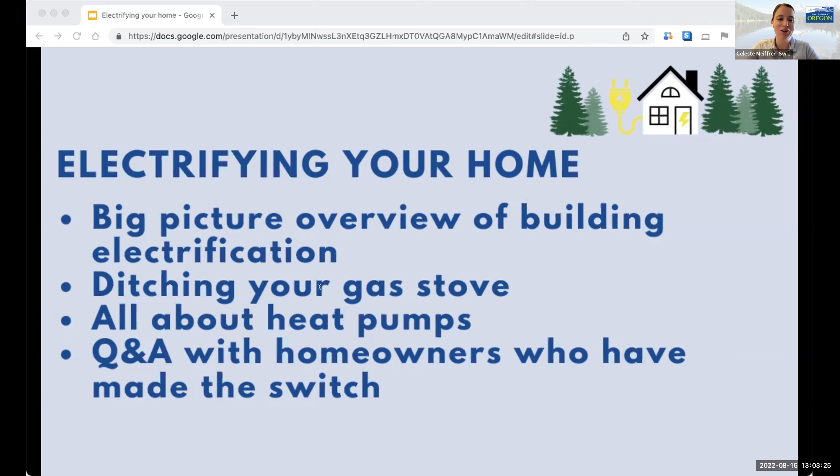So why electrify your home? A greener, healthier world requires each of us to do all that we can to eliminate the pollution and practices that are warming the planet and changing our climate. To get there, Oregon and the United States must move toward meeting our energy needs with 100% renewable energy like wind and solar. That's going to require that we get the most out of every bit of energy we use and that we stop burning fossil fuels, including in our homes and commercial buildings.

Buildings are second only to transportation as a source of climate pollution here in Oregon, responsible for 34% of the state's total greenhouse gas emissions. There are almost 140 million housing units in the United States and 5.6 million commercial buildings. 3 out of every 4 American homes uses fossil fuels directly for space heating, water heating, and appliances. So the direct burning of fossil fuels accounts for more than half of all energy used in homes and at least 34% of all energy used in commercial buildings.

These tens of millions of housing units and millions of commercial buildings will eventually need to be electrified. Wind and solar power are rapidly replacing dirty fossil fuels like coal as leading sources of our electricity, and our grid is only going to get cleaner and cleaner. In 2021, the Oregon legislature committed our state to getting 100% of our electricity from clean sources like wind and solar by 2040.

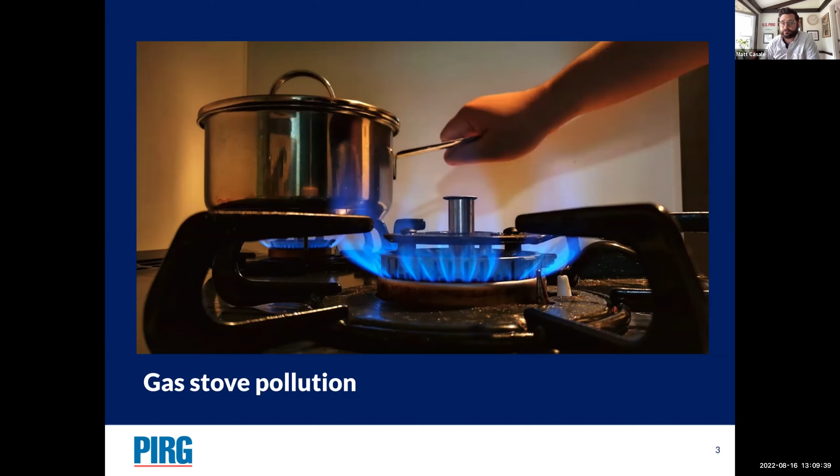If you do have a gas stove in your home, this is no time to panic. You don't need to run and rip it out of the wall right now, although we'll talk about ways that we can get there. There are steps you can take to protect yourself and your family in the meantime, but they're not perfect solutions. So next time you are in the market for a stove, I would consider going with electric or induction.

In the meantime, some things you should do: make sure you have proper ventilation in your kitchen. It's best to use a ducted vent hood, meaning your unit actually vents outside rather than circulating the air inside. Use it every time you cook, not just when you burn something. To the extent possible, only use the back burners, which are more likely to be captured by the vent. Open windows or doors to allow air to circulate. Get an air purifier that can help with particulate matter. You could also buy a low-cost portable plug-in induction hob, which is basically just an extra burner or two that doesn't run on gas, which you can plug into your wall and use in lieu of your gas stove whenever possible.

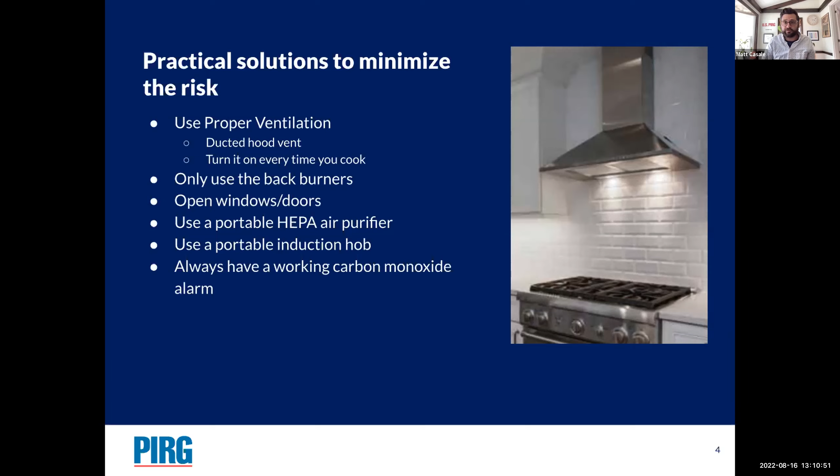So some ways to protect yourself if you have a gas stove. But ultimately, we shouldn't have to go to all these lengths just to make sure that a product we've purchased legally and installed correctly isn't pumping pollutants into our homes.

I'm calling this slide policy solutions, but it's really about the bigger, broader changes we need to protect people from indoor air pollution and move our society off fossil fuels like methane gas and toward renewable energy and electrification. These are things governments should do, things manufacturers and retailers should do in order to make sure people are protected.

First, we can and should adopt health-based indoor air quality standards and ventilation requirements for gas stoves. We shouldn't allow products to be sold or installed in homes that will exceed health-based standards and that don't meet strict ventilation requirements. We should also require gas stoves to include warning labels so people know what they're getting into when they purchase one.

Because electric and induction stoves run on electricity and not gas, they are more energy efficient. We should also provide local, state, and federal incentives for kitchen electrification. We'll talk about some brand new federal rebates in a minute, which will be effective in about 20 minutes when the bill gets signed.

Also important to remember, we need to protect people who rent or live in public housing, people who don't purchase their own stoves. So we should require electrification in public housing, require landlords adhere to strict air quality standards, and provide incentives for electrification of rental units.

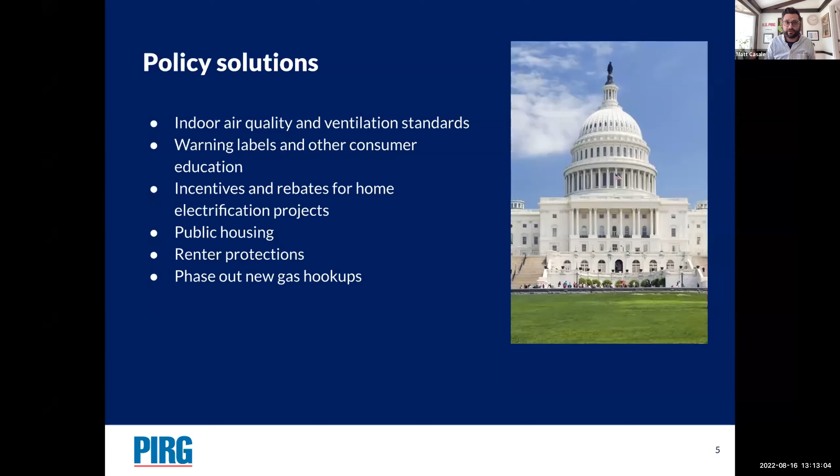Okay, so gas stove pollution, that's how I bring the mood down at every party I go to, or anytime I see my family and someone has a gas stove. Now I want to talk about some of the more exciting good news type stuff.

Fortunately, we do have options, and they are really good options. I have an electric stove in my house and I love it. It has a quick boil feature. It's not as fast as an induction stove, but it does boil water really fast. And I do have 2 young daughters who are 2 and 5. They love their mac and cheese. And when I'm being heckled by a 2-year-old and a 5-year-old to get their mac and cheese on their plates faster, it's nice to be able to boil water fast. So that's one side benefit.

Electric cooking has come a long way. Stoves like the one that I have are actually really nice and work really great. And there's no more of those coils that everybody used to hate.

Induction cooking, I like to say, is the future here today. In fact, it's not that new, and it's been used in Europe for a long time, but it is newer to many people here in the United States. The technology is really cool and exciting. It's fast, efficient, and pollution-free. Induction cooktops use magnetism to heat metal cookware.

When you turn on the stove, the electric currents underneath the smooth cooking surface creates a magnetic field within the cookware itself. So that means the heat is directly transferred to the pot itself. The stovetop actually doesn't get that hot. So that allows you to boil water faster. It allows you to have greater control over temperature. Lots of professional chefs actually are now adopting induction because of the precision and skill you get with induction.

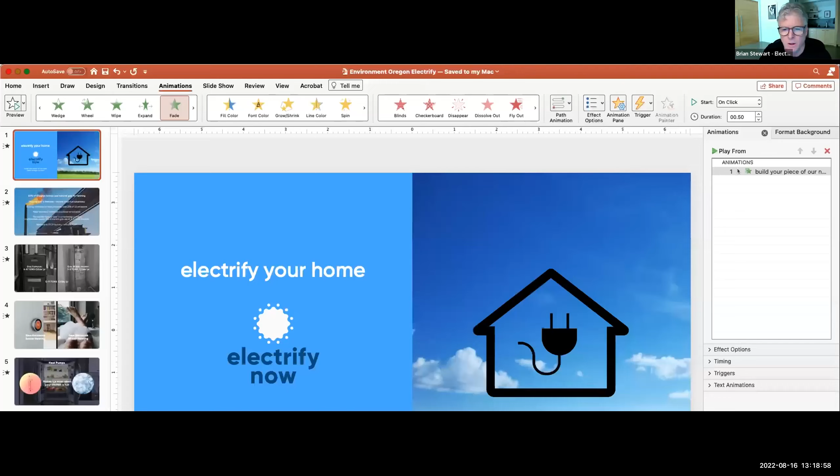We're an all-volunteer organization, and our reason to exist is to help people understand the benefits of electrification, not only to cut carbon emissions, but to make your home safer and more comfortable, as Celeste said. And we like to think of this as a systems problem that we've got. Our current fossil fuels based energy system is the number one reason that we're having these conversations about climate change. And so we like to think about these actions that we're about to talk about as ways that you can help build your little piece of the new clean energy system that we need for a sustainable future and just better lives altogether.

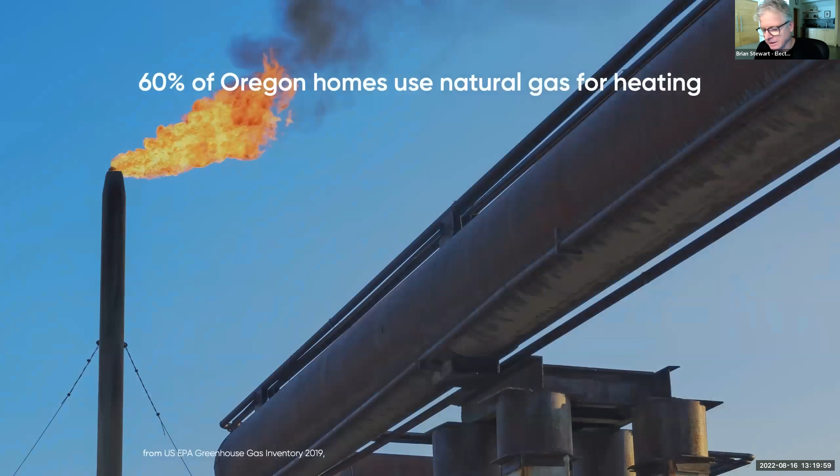The reason this is so important here is to talk Oregon specifically. 60% of the homes in Oregon use natural gas for heating. And we've all kind of grown up with this idea that natural gas is clean burning fuel. It's a marketing ploy from the gas industry. They're really good at this, but it couldn't be farther from the truth.

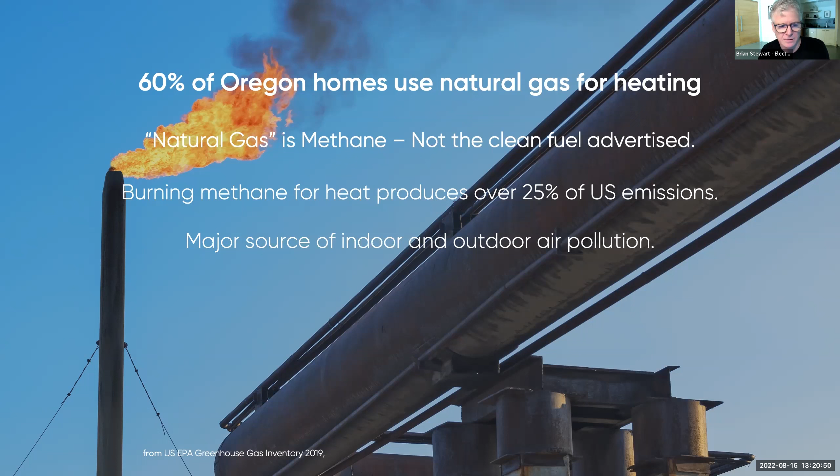Burning methane, which is what natural gas is, produces over 25% of US emissions, and that's just for using methane for heating. This doesn't include the methane that's burned for electricity. So heating our homes, our offices, our buildings, our industry is a huge part of the overall carbon emissions in the world. And it's also a huge source of indoor and outdoor air pollution. We tend to think about cars and coal plants and stuff as creating air pollution, but all of our gas burning devices, natural gas or methane burning devices, create indoor and outdoor air pollution.

You may have been hearing from the gas utilities. Northwest Natural is really aggressive about this, talking about renewable natural gas as if that's going to fix everything. This is another marketing concept from the gas industry. There's some benefits to renewable natural gas, but it's just not going to solve the problem. The idea that we can just keep burning gas in our homes because it's going to be renewable is literally a pipe dream. And that's because at the very best, we could expect about 15% of the current gas use to be supplied by renewable natural gas.

And it's expensive. It's like 2 to 5 times the cost of fossil gas. So the idea that it's going to just be the silver bullet to replace our current dependence on gas for heating our homes is just not true. So it's important for all of us to get our brain around the idea that we have to stop burning methane as soon as possible. Reducing is great, but it's really about stopping our dependence on fossil gas.

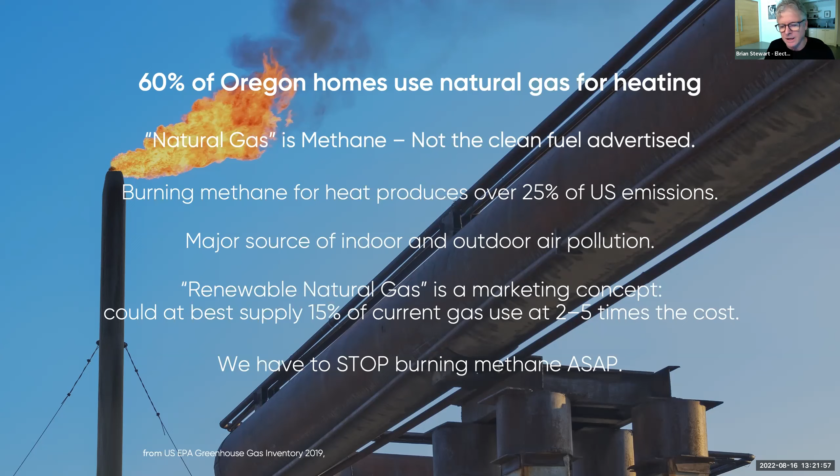That's the answer. And in our own homes, the big culprits are our gas furnace and our gas water heaters. These two devices consume the vast majority of the energy in our homes and produce the vast majority of carbon emissions.

Collectively, it's something like 5 to 11 tons, and this range reflects the different sizes of our homes, the different energy efficiency levels of our devices, how well insulated our homes are, how much water we use. If you have teenagers, for example, you're going to be at the higher end of the spectrum here. But just to put this in perspective, an automobile produces 4 to 8 tons.

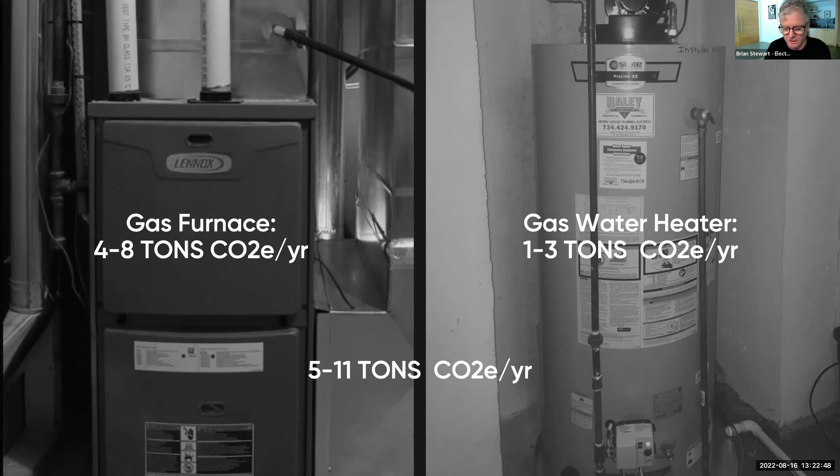So your home, if you're heating with gas, is producing more emissions than an automobile. I think most of us kind of get it that cars produce emissions, but it's more invisible to us, the emissions that come from our home. But it's entirely possible to have zero emissions space heating and zero emissions water heating. That's what we're going to be talking about today.

And the reason that this is possible is because of a technology called heat pumps, which most of us are kind of unfamiliar with, and they can appear to be quite magical in the way they work. But I think for most people, the simplest thing is just to understand that we've had these devices in our homes for years. A refrigerator is a heat pump, for example. And the way it works is it moves heat from one place to another, so it's pumping heat. That's why it's called a heat pump.

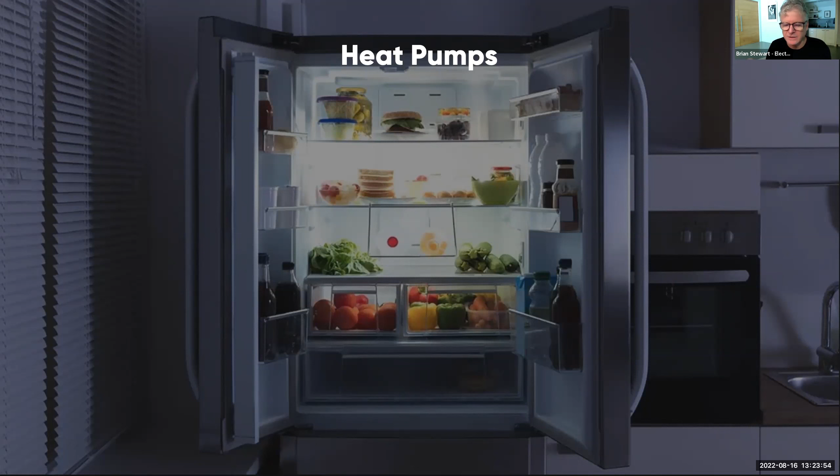So in this case, it moves heat out of your refrigerator into your kitchen. So your kitchen gets slightly warmer, and inside that insulated refrigerator, it gets dramatically cooler. In fact, it can even make ice. And the amazing thing about this, if you've ever put your hand behind a refrigerator, you've probably felt that hot air, or maybe it blowing hot air from underneath. That's this transfer of heat from one place to another. And it's incredibly energy efficient and effective.

Even if your kitchen can be really hot, like last year during the heat dome, our kitchen was almost 100 degrees before we turned on the air conditioning, and we were still able to make ice in the refrigerator. So these heat pumps can deal with huge temperature differences and are incredibly efficient.

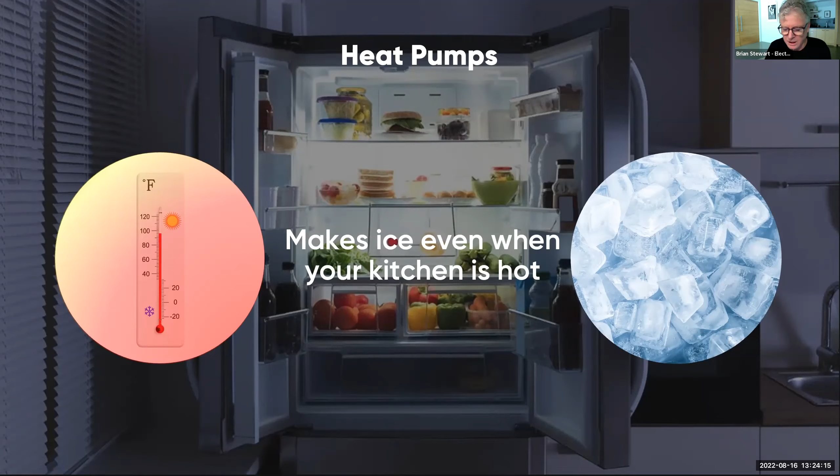The easiest of the two, space heating and water heating, to get your brain around is probably the water heater, although in some cases they're the least familiar to us. This technology has been around for decades. It's just starting to get market penetration. It's something in the single digits in terms of new installations are heat pumps now, maybe as high as 10% in some places. We've had ours for years.

They look just like regular water heaters, but the way they work is they move air across this unit at the top, moving air across a coil that has refrigerant in it. It absorbs heat from the air. Then that refrigerant is compressed, which increases the temperature content of the refrigerant, and then the refrigerant is pumped around through these coils around the storage tank to heat the water, and then that cools the refrigerant, and then it goes through that cycle again.

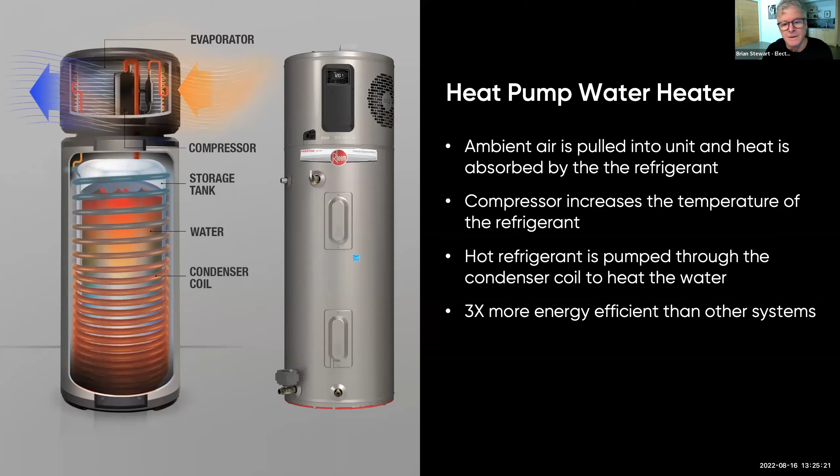And these things are insanely efficient, 3 times more energy efficient than any other way of heating your water, which is dramatic. So what that turns into in terms of operating costs is also very attractive.

These are 3 typical systems: electric storage, which is the most expensive to operate. This information comes from the EPA, energy guide labels from the Department of Energy. Gas storage units are slightly less expensive to operate, and gas tankless are thought of as the most energy efficient, although they've got their own problems with emissions that we won't talk about today. But these are the 3 typical systems that you will see.

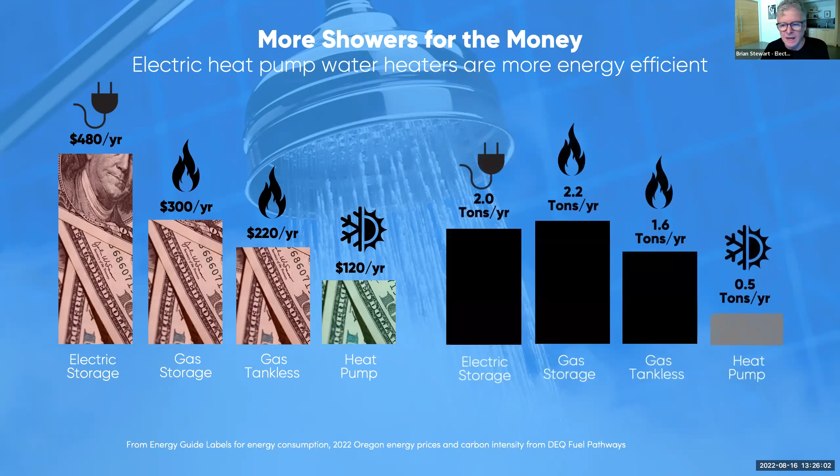A heat pump is dramatically lower in cost to operate than any of those. By far the cheapest way to heat your water, and by far the fewest carbon emissions per year. And this is just with standard electricity right out of the grid, at average Oregon emissions levels. You can get renewable energy in your home.

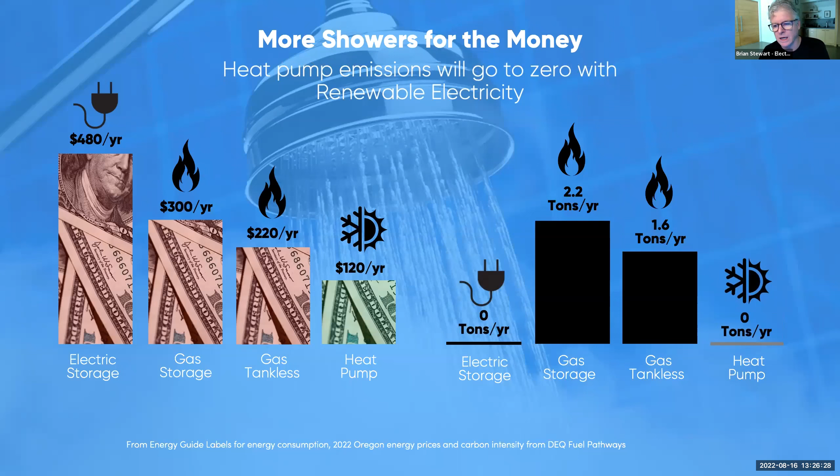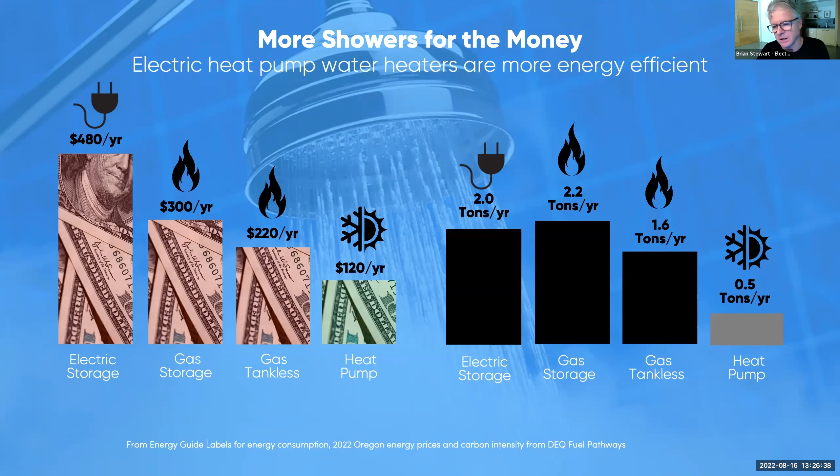And you can get 100% clean energy in your home today, literally, in which case you will have 0 emissions from your water heating. So I like to think of it, this is the way things look today, but because of these laws that Celeste mentioned, the 100% Clean Act here in Oregon, very soon it's going to look like this for everyone. But you can do it today by getting renewable energy through community solar and other methods.

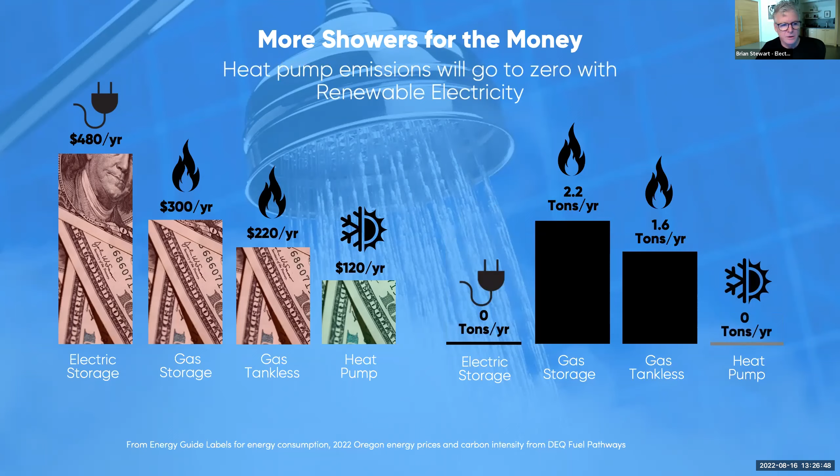They're the distributor for the Rheem units and other models. You can get $1,000 off a 50-gallon hybrid unit. They're often called hybrid electric water heaters, or heat pump water heaters. That $1,000 off will be shipped directly to your home.

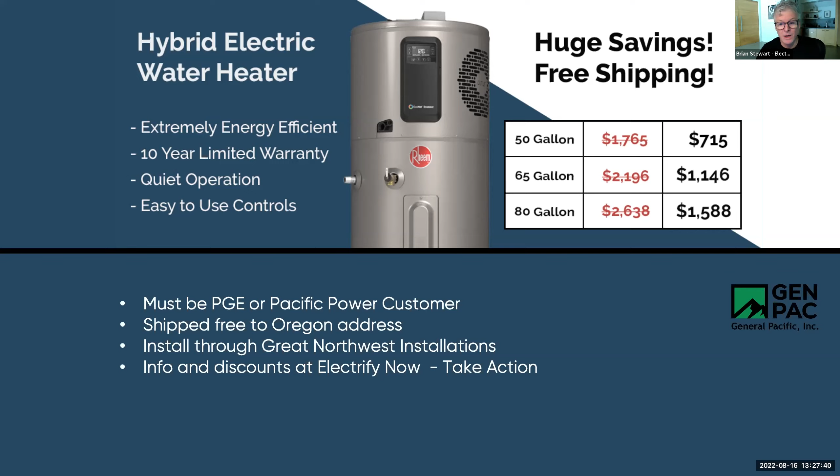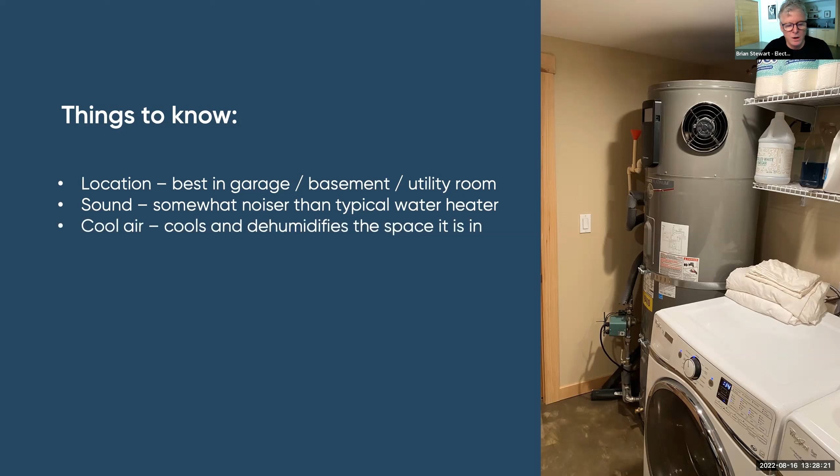It's important to know a few things about these devices. They're a little different than other water heaters. Their best location is in a basement, a garage, or a large utility room, partly because they make a bit more noise than a typical unit. If you have a power vent gas water heater, they're quieter than that, but if you have an electric water heater, they're noisier. They're like a refrigerator, but you don't want this next to your living room, for example. They produce cool air because they're taking heat out of the space they're in to heat your water, which lowers the room temperature by a couple of degrees. So again, you don't want that in your living space.

They're slightly taller than conventional units and need enough cubic volume of air around them to operate — about 700 cubic feet is typical, so like a 7 by 10 room. They also need 240 volts of electricity. If you've got an electric water heater now, that's no problem since it also uses 240. But if you've got a gas water heater and are replacing it with an electric heat pump, you'll probably need an electrician to run a new 240 line to the water heater's location. It also needs a condensate drain.

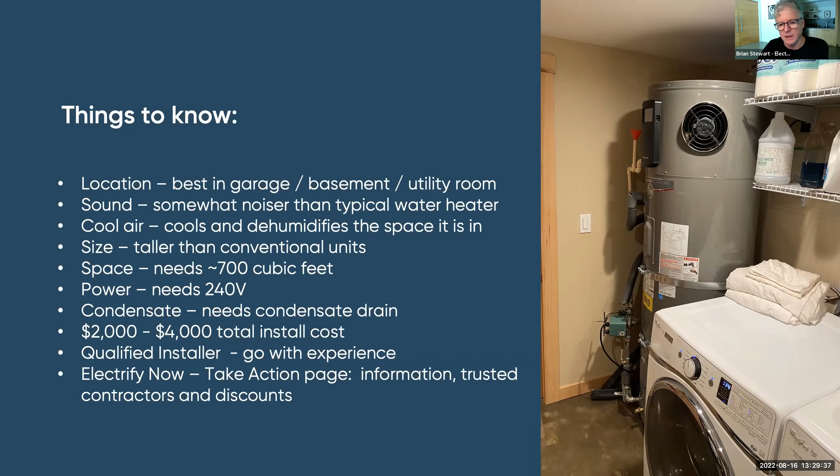That's nothing to be concerned about — gas furnaces have these, a lot of devices have these, and a plumber can do it, no big deal. Total installation cost runs about $2,000 to $4,000. It'll be on the lower end if you're replacing an electric water heater, and towards the higher end if you've got a gas water heater, but it depends on your situation. Go with a qualified installer — don't just call any old plumber, since some of them will try to talk you out of it. We've got great information on our website about trusted resources, contractors, and discounts, so check it out.

These things are amazing. They give you the same water heating performance, the same hot water you're used to. They're cheaper to operate, with much lower emissions, even potentially zero emissions. And they come with a 10-year warranty, which shows the confidence manufacturers have in this technology — a typical water heater is more like 5 to 6 years. So these things are not going to break, it's not squirrely technology. It's ready to go, so go for it.

Let's talk about space heating. It's similar technology, but in this case the condenser unit is outside, and ambient air is pulled across that outside unit. They're typically shaped like cubes, similar to an air conditioner, or you can find them with side discharge, more suitcase shaped. This is outside your home, harvesting heat from outside, consolidating it in refrigerant and compressing it to increase the heat value, then pumping it into the house. That refrigerant heats air which is blown into the home. The amazing thing about heat pumps is they can operate in both directions for space heating — so it can work as an air conditioner but also heat your home. Same device, you don't need two devices.

And they're incredibly efficient, like we talked about before. You often hear the term COP, or coefficient of performance — that's a ratio of the heat energy you get, think of it as BTUs of heat divided by the BTUs of energy it took to produce that heat. These have a COP of 3, meaning you get 3 times more heat energy than the energy you purchased to run the device. That's 300% efficiency. Just for comparison, the most efficient gas furnace is like 0.95 efficiency.

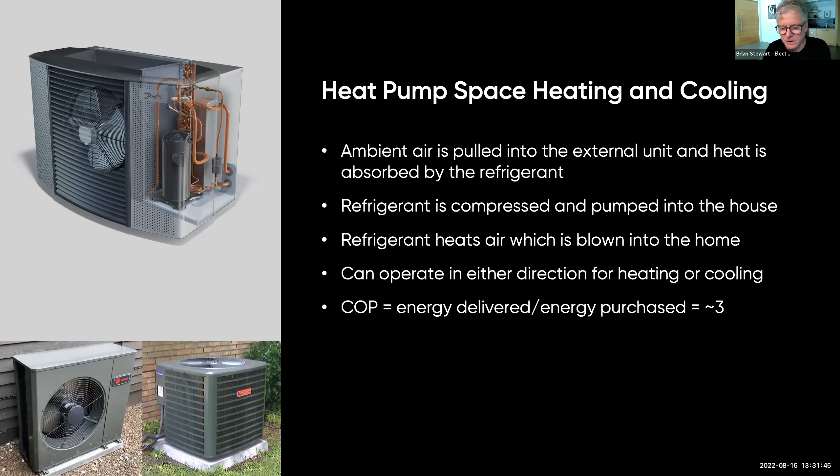They come in 2 different kinds of configurations, and there can be combinations of these things, but to keep it simple, there's ducted systems, which provide heating and air conditioning. This is the best solution if you've got a gas furnace now in your home and ducting.

So you can see there's this external unit we talked about. The refrigerant lines go into your house and into this air handler, which looks just like a furnace, which is connected to the ducts, which blows that warm air or cool air into your home.

The great thing about these ducted systems is you can put really good filtration systems on there to filter out smoke and dust particles, anything that you don't want to be breathing. You can even put HEPA filters on there, which increases the amount of filtration you get, which is really great for those smoky wildfire days.

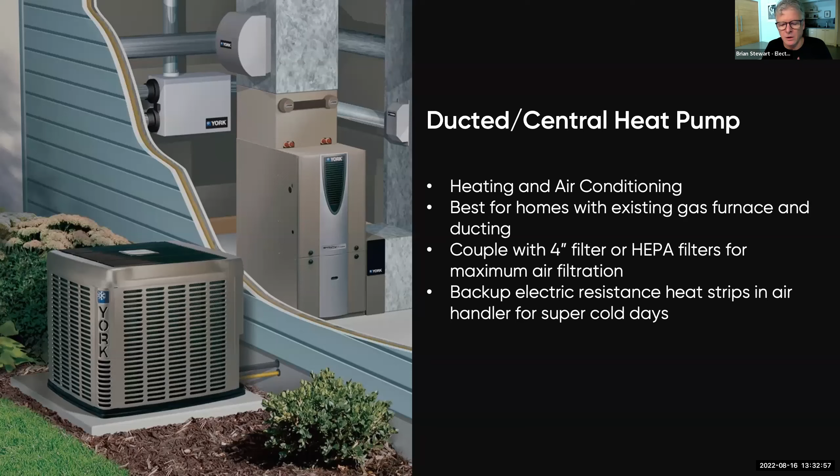And these things can come with backup electric resistance heat strips inside the air handlers for those super cold days, just to make sure that you are always warm and comfortable. We have that in our home, and we can see when they turn on. It's a few hours literally every year that they're called into service because the heat pumps are so effective.

They also come in what's called ductless or mini split configurations, where you also have this external condenser unit outside, compressor condenser outside, refrigerant lines that go into your home. But instead of ducts, now you've got what's called a wall-mounted head or mini split that's up on the wall, and this has a fan in it that's going to blow warm or cool air into the room.

And so you can get these that have multiple heads for multiple rooms. The best application for these devices are homes that currently have electric baseboard heating, or maybe you've got a gas furnace and one room is really cold and you can use this to make that room more comfortable.

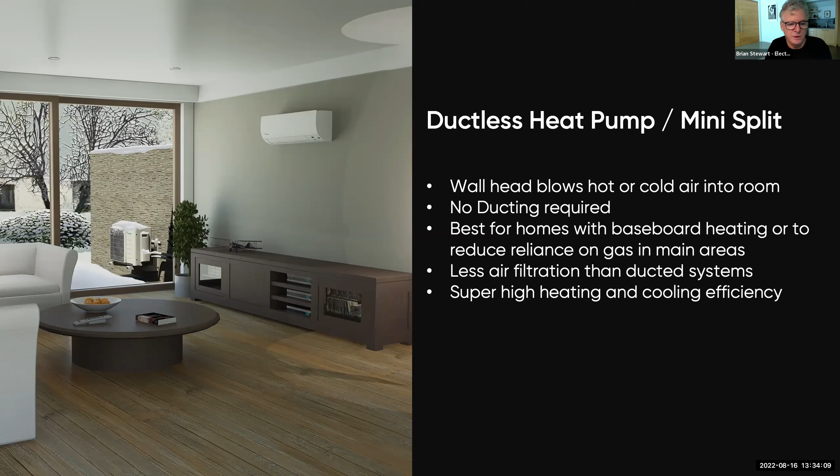Or you can massively reduce your reliance on gas heating by putting this type of system in the rooms that you occupy most, like your living room, your dining room, your kitchen, and then the other rooms can be heated with gas, and that can massively reduce the amount of gas heating that you use. They don't have as good filtration options, but they're incredibly efficient. These are some of the most efficient heating systems that are out there.

In terms of cost, these are the 3 typical systems that you see in older homes. Some old homes still have oil furnaces. That's starting to be a bit rare, but some do, and it's incredibly expensive to heat your home with oil. This is the cost per million BTUs, that's just an easy apples to apples comparison for the cost of heating.

But you can see what that translates into annually for typical homes in Oregon. Very high cost for oil furnaces, also high cost for electric baseboards, which is why gas furnaces have been so popular. They're cheaper than either electric resistance or oil furnaces. And this is why so many homes swapped out into gas heating many years ago.

But if you compare that, if you're upgrading, you could upgrade to a high efficiency gas furnace and save more money because you'll get a more efficient system. Electric heat pumps are as cheap or cheaper than the most efficient gas furnaces. So if you're going from an older gas furnace, you're going to see a cost savings with a heat pump.

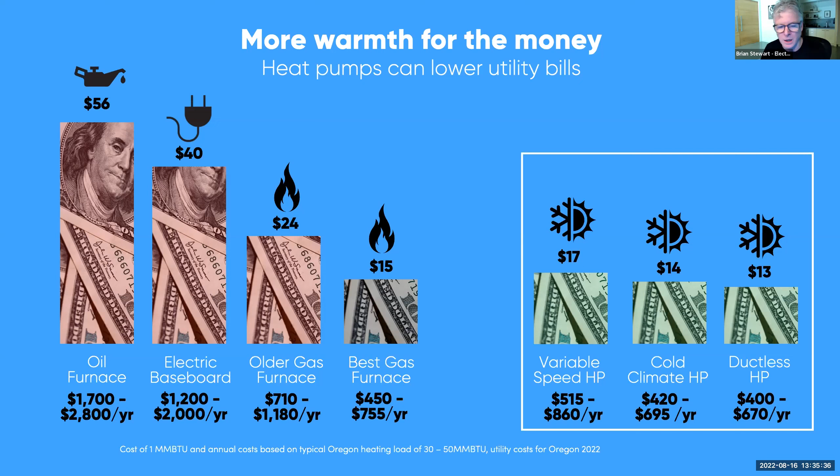If you've got a new, pretty high efficiency gas furnace and you just want to do this to lower your carbon emissions, you won't probably see a huge savings in terms of the cost to heat your home, but you will be getting air conditioning with the same system, and you will dramatically reduce your carbon emissions. This is what it looks like for the conventional systems, and heat pumps are dramatically lower than that.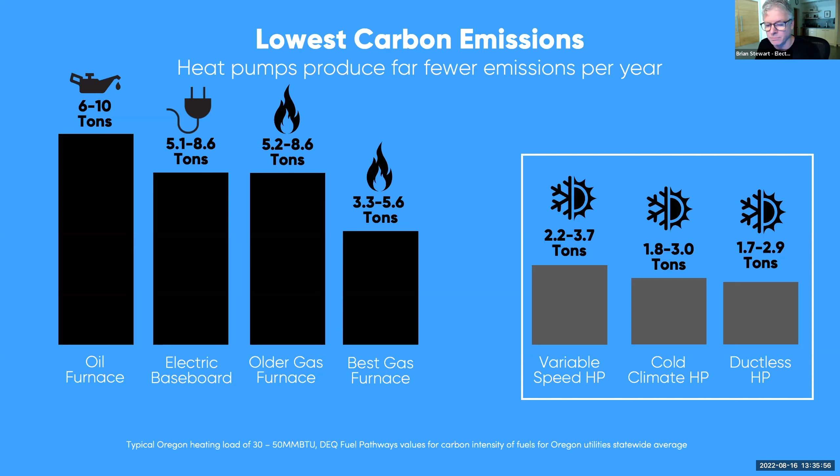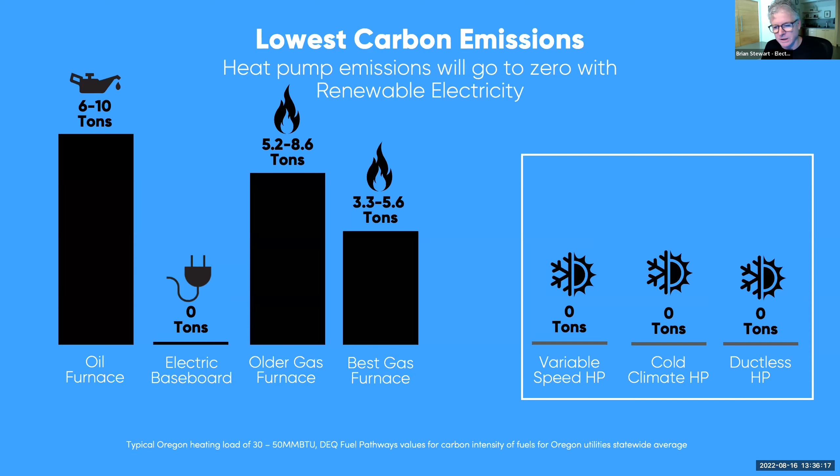And again, if you've got renewable energy in your home, or even if you don't, if you install a new heat pump now, in its service life, it's going to be creating 0 carbon emissions because the electricity here in Oregon is trending towards 100% renewable really quickly. So again, cheaper to operate or comparable to the most efficient systems, and massively lower carbon emissions.

There are some important things to know. If you've got an older home, this is the same situation that Matt was talking about with induction stoves. If your panel is a small 100 amp panel and it's full, you may need a panel upgrade, which can be expensive. It can cost $3,000 to $5,000.

There's absolutely no reason to have a gas furnace backup with a heat pump system. Some installers may try to talk you into that. If they do, say thank you and call someone else, because you do not need that. Absolutely, categorically do not need gas furnace backup.

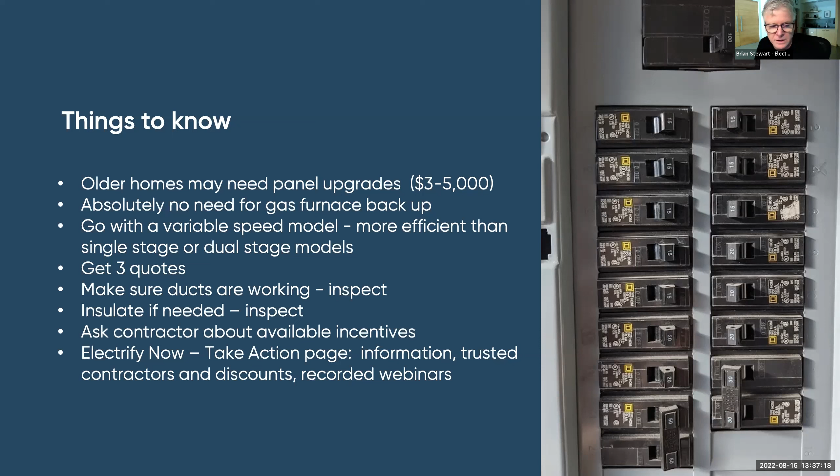You will want to go with a more efficient unit. They're often called variable speed units. They're more efficient than single stage or dual stage heat pumps. So it's worth spending the little extra money to get the variable speed units.

Get 3 quotes from installers. Don't be bashful about this. Get someone who feels like they're giving you good service. And one part of good service is someone who's inspecting the ducts to make sure the ducts in your home are working. If you've got a ducted system, make sure they've checked the insulation to see if you might need to add a little bit somewhere. If they don't look at that stuff, you might want to go with someone else, because you want the person you're working with to be thinking about your whole house, not just the device they're selling you.

Ask your contractor about the available incentives. They will know all of the incentives that are available here in Oregon. We're going to talk about the Inflation Reduction Act in a minute, but contractors are very familiar with all the other ones.

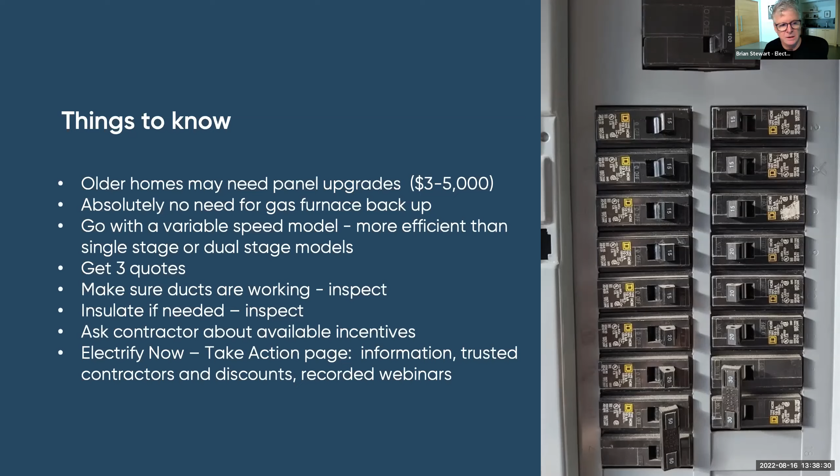These things are going to give you heating and cooling with one system. You're going to feel more comfort because they produce more constant temperatures, more continuous air movement, which means more air filtration, which all adds up to no cold spots in your home and more superior comfort. And you can avoid 4 to 8 tons of carbon emissions with renewable energy.

The Inflation Reduction Act is complicated and there's a lot that hasn't been worked out, but here's some of what we know. There will be tax deductions up to 30% of the cost for energy efficient home improvements, up to $2,000. It might be more than this, but it's at the very least $2,000. It might be as high as $3,500 or $4,000. This is the way we will be able to get tax deductions for the costs we incur for heat pumps, panel upgrades, and heat pump water heaters.

If you're an income qualified family, there will be appliance rebates attached right at point of sale that can be as high as $8,000 per household, which is amazing on the cost of the equipment itself. There's also $500 million going into domestic manufacturing of heat pumps to supercharge the R&D in this area, which will lower the cost of these units over time. This will take time until we feel it in the market, but it's really important long term to make sure these things happen at the lowest possible cost.

There will be an extension of the solar and storage tax credits up to 30% of those costs. It's hard to answer right now exactly when this will take effect. I think it's very likely this will apply for the 2022 tax year, so by the time we do our taxes in April 2023, these things will be worked out. I believe that if you're doing the work this year, you'll see those tax deductions available to you, but I can't promise that for sure. They will be available in the 2023 tax year.

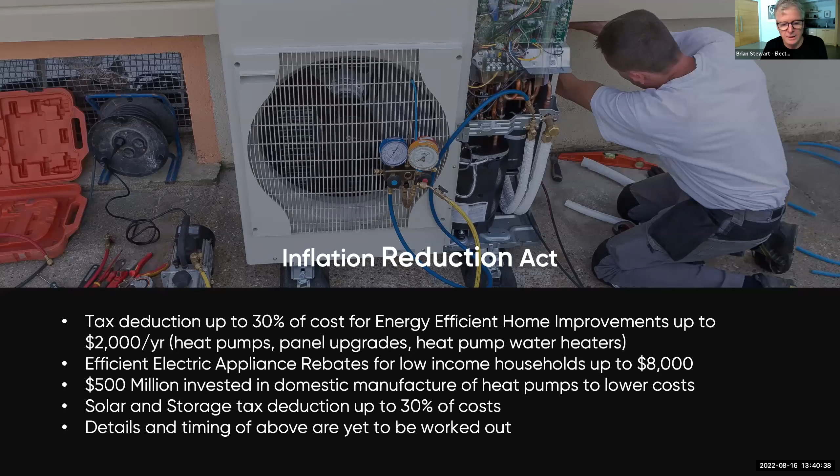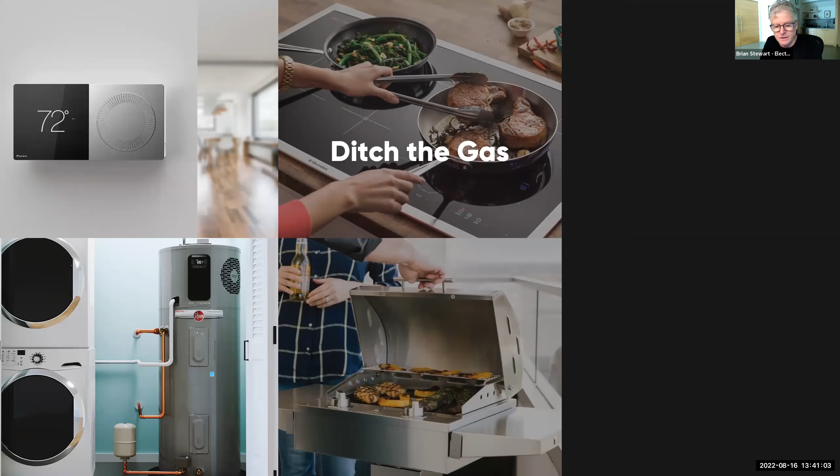I hope this inspires you to ditch the gas. We've talked mostly about space heating and water heating. The same is true, as Matt mentioned, for induction cooking, but also for outdoor grilling. You can replace a propane stove, a propane grill, or a charcoal grill, which creates crazy amounts of air pollution, with an electric grill—much cleaner, easier to maintain, etc. You can ditch your gas fireplace and put an electric one in.

Your friends, you won't even be able to tell the difference. They also give you better temperature control, and you can even have the flame on without the heat if you like that. Sometimes I know with our old gas one, our

living room got too hot. Ditch your gas lawnmower and your trimmer and blower and replace those with electric devices. All these things work better. They'll give you better performance and comfort, massively superior air quality, lower your expenses, and easier to clean and maintain, and avoid at least 5 to 11 tons of carbon emissions per year, more if you've got these other devices in your homes.

And I would hope that all of us would aspire to actually cut the gas pipe to our home. We've done this in our house. Call Northwest Natural, they'll come take your meter away. They'll even cut the pipe at the street, won't charge you for that. That'll save you another $150 a year just for your hookup fees, and avoid methane leaks and help scale back the gas system, which is what has to happen on a large scale here in the United States.

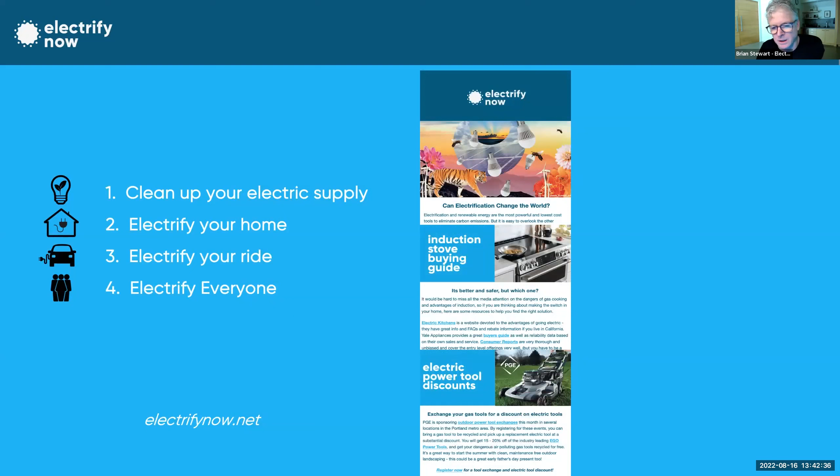And our website we try to keep it really simple. We have a monthly newsletter that you can sign up for, which is filled with tips and information on incentives and discounts. And also, webinars on every one of these topics that you can watch at your leisure. They're recorded, and you can find that information on our website.

So that's it from me. Thank you very much, and good luck with all your clean energy projects.